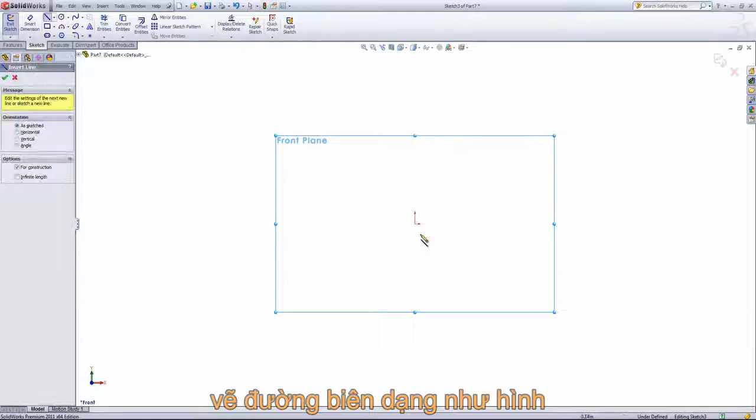And first we'll use the centerline tool and draw in a line vertically from the origin. And then we'll give that a dimension of 3 3/4 inches. From there, we'll start drawing in the profile using the line tool. And we're going to draw in a horizontal line slightly above the origin.

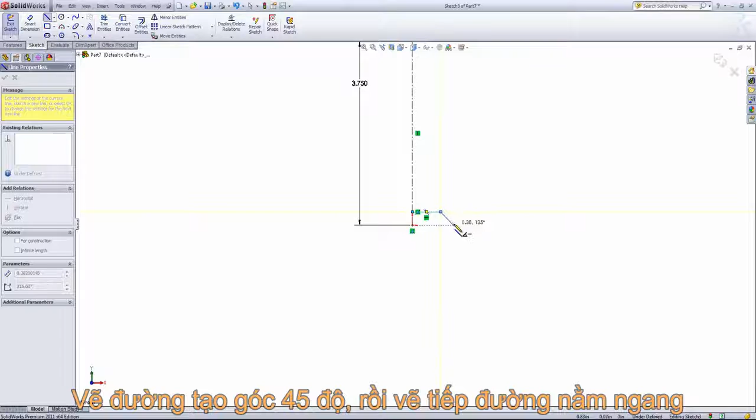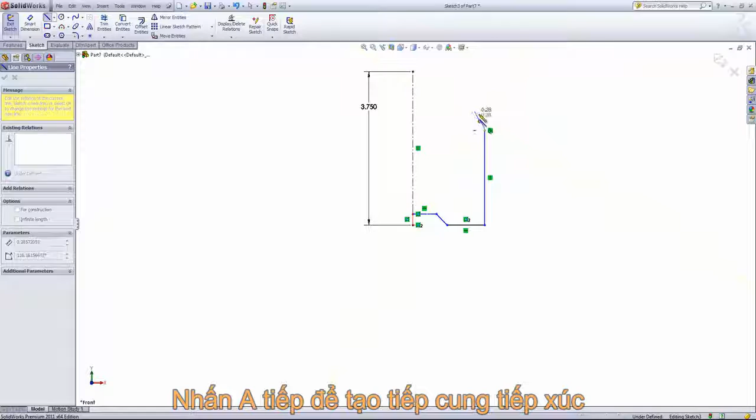And then draw down an angled line. It's also horizontal with the origin. And then we'll sketch out another horizontal line here. From there, I'm going to draw a line up. Then press A to create a tangent arc and add in one tangent arc. And then I'll press A once again to add in yet another tangent arc. And then from there, I'll draw up a vertical line.

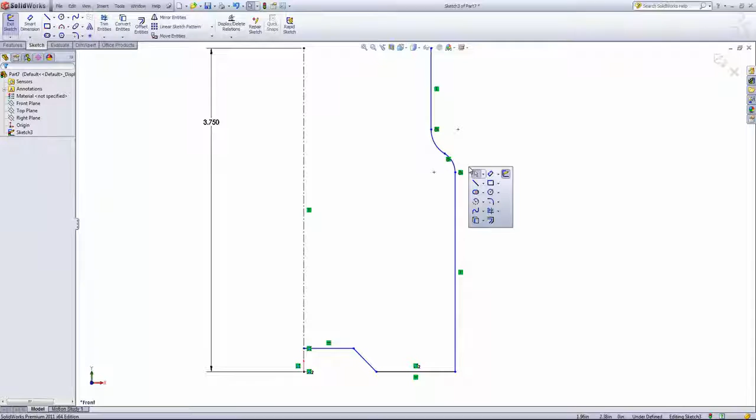Now, depending on how you added in the tangent arcs and the vertical line, you may need to add a tangent relation between the two arcs there. So go ahead and add those in if necessary. And then from here, we can start adding in dimensions. So this outside line segment is going to have a height of 2 3/4 inches. The bottom line here is going to have a length of 1/2 inch. And the top line will have a dimension of 3/8 of an inch.

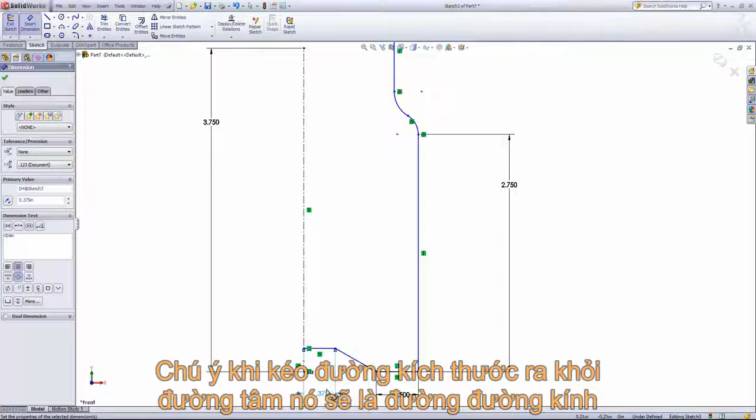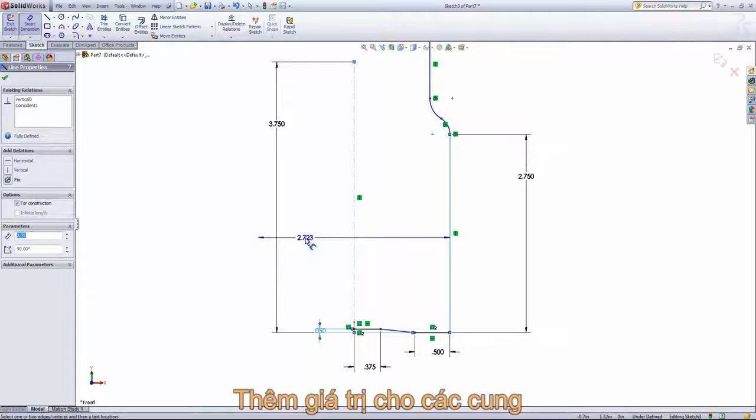And this indent here is going to have a height of 50 thousandths of an inch. And then we'll give this profile for the bottle a diameter by clicking on the outside line and clicking on the center line, and just dragging the mouse out to the outside of the center line. And we'll set that to 2 inches.

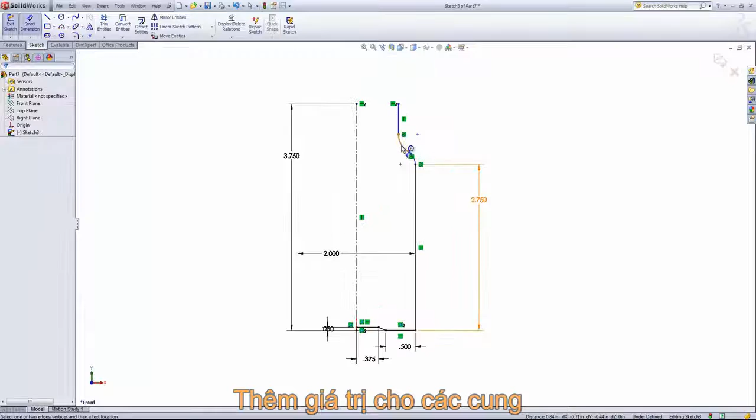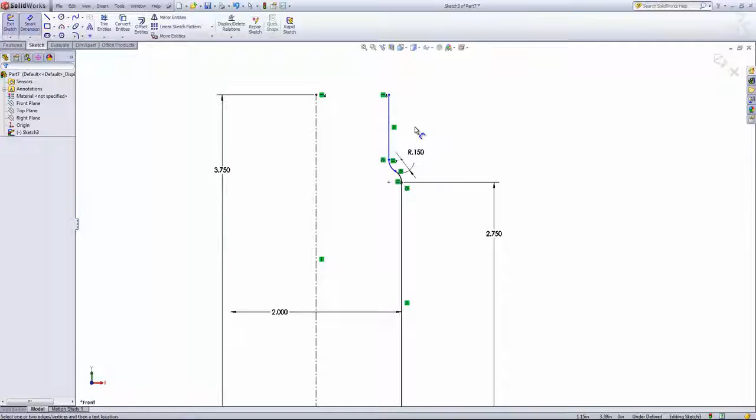Next, I want to make the top point of our profile and the top point of the center line there horizontal. And then I want to add in dimensions to our two arcs. This is going to be 0.15 inches. And the other arc is going to be equal in curvature. So we'll go ahead and make these two equal. Next, we'll dimension the top of the profile off from the center line and set a dimension of 0.675 inches.

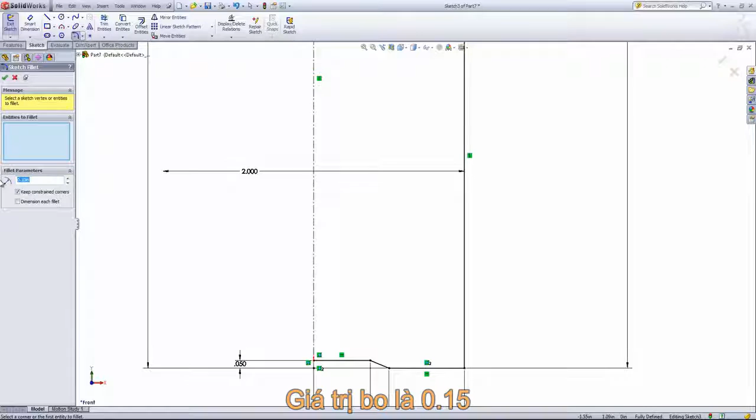And lastly, we want to create fillets at the bottom at the 3 corner points that we have on the sketch. I'll set the fillet parameters to 0.15 inches and choose those 3 corners. And then click OK.

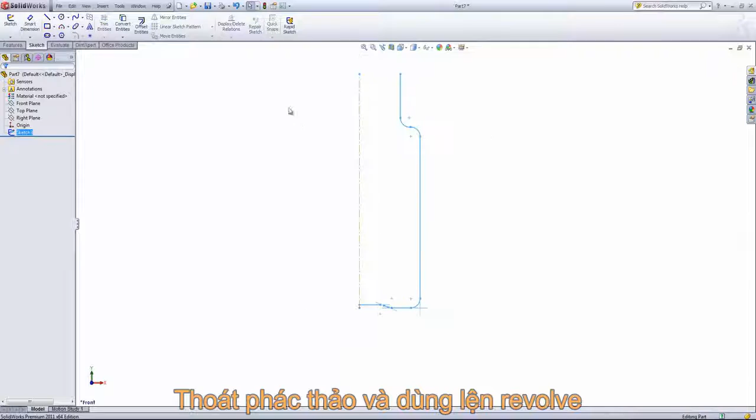From here we can exit the sketch and go into the Features tab and choose the Revolve Boss Base option. And we get this error message asking if we want to close the sketch. In this case, we want to choose no. And it'll automatically choose that thin feature option. If it hasn't already chosen that center line as the axis of revolution, you can go ahead and select that. And we're going to leave this at a thickness of 0.1 inches.

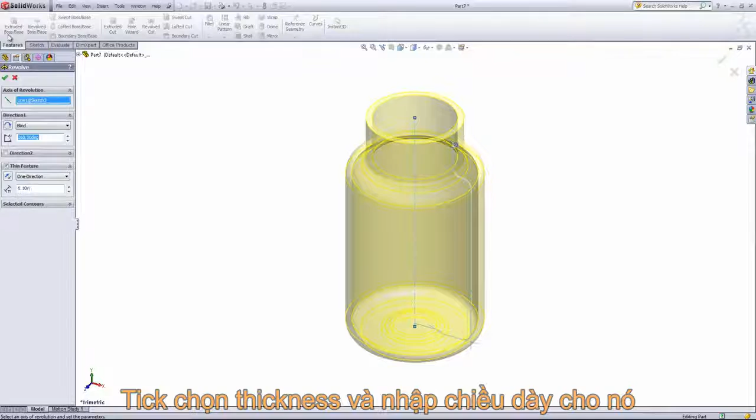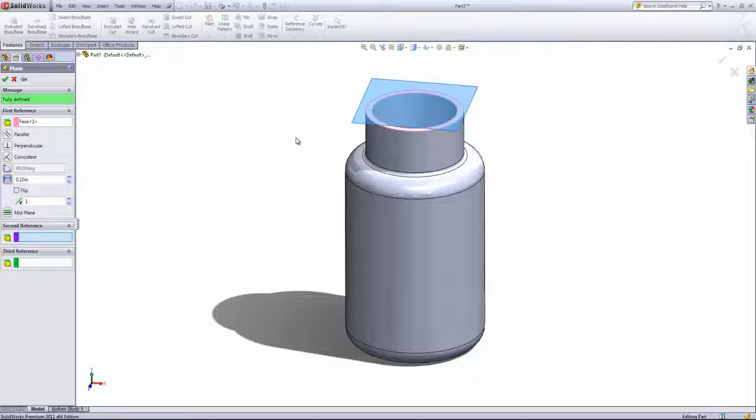Now that we have a profile for the bottle, we're going to create a thread for the cap. And we'll do that by choosing this top face, going to Reference Geometry, and selecting Plane. From there, I want to set this as 0.1 inches from that face. And I'm going to go ahead and flip that so it goes into the part, and click OK. From here, we'll create a sketch on that plane. And selecting the top edge, we'll go to Convert Entities and convert over that edge.

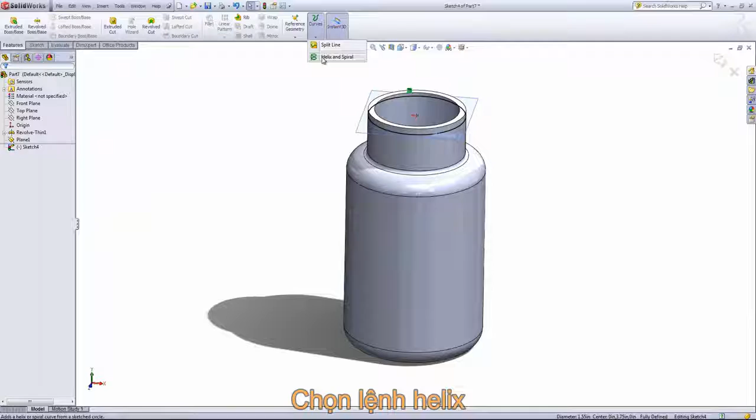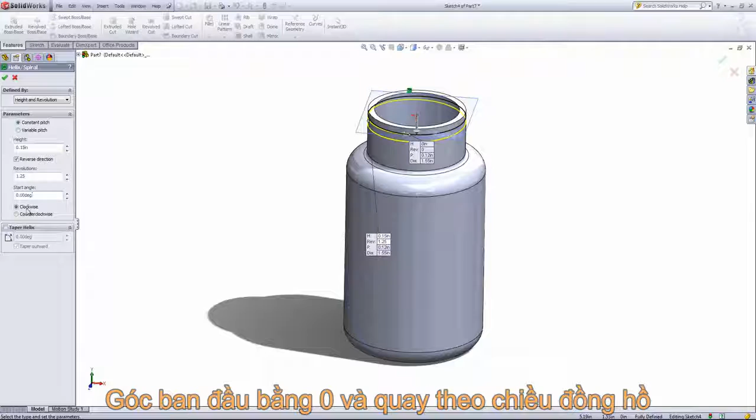Next, I want to come back into the Features tab and choose Helix and Spiral from the Curves pull-down. And we're going to define a helix by height and revolution. We're going to choose a height of 0.15 inches. Choose 1 1/4 revolutions, a start angle of 0, and we'll set this to clockwise. And click OK.

We'll be creating the thread for the bottle by using a swept feature. So next we need a profile for the sweep. Before we do that, I'll go ahead and click on the plane and hide that plane, making it a little bit easier to see. Then we'll create a sketch on the right plane.

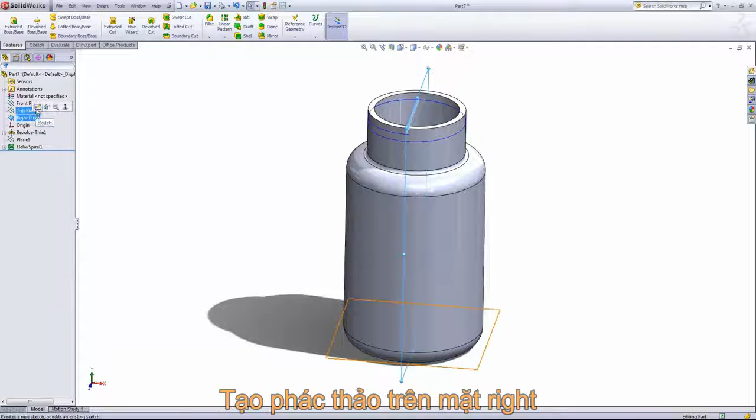I'll go ahead and draw in a trapezoid here. We're going to make the two opposing sides equal, then put a point at the midpoint of the back.

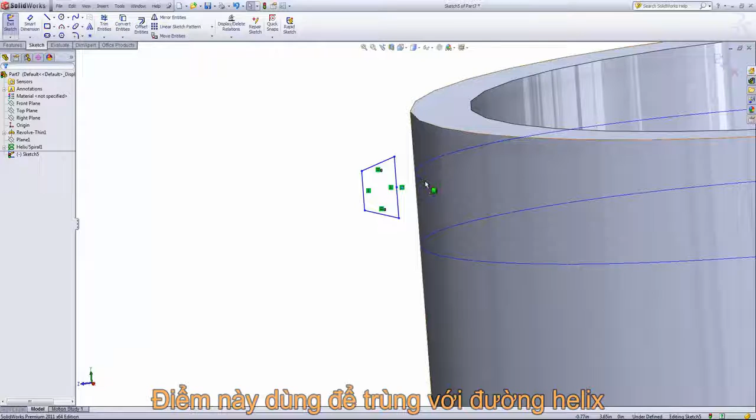That point will allow us to create a pierce relation with this helix. We want to select the helix, making sure not to select the point at the end of the helix since that contains no actual data. So we select the helix and the point and choose a pierce relation.

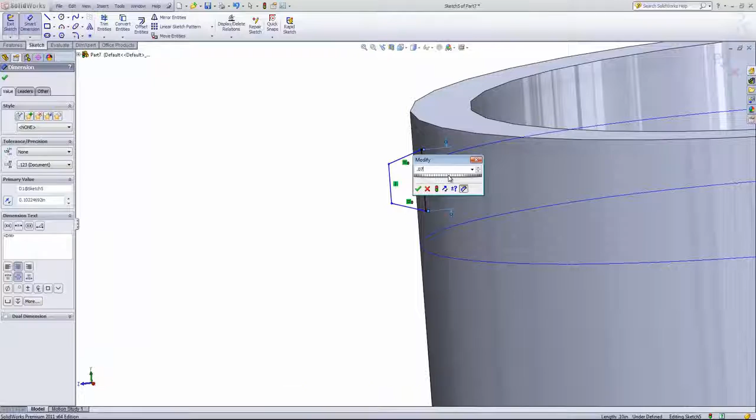Then we can add in dimensions. This is going to have a length of 0.07. This will have a width of 0.025. And this line will have a length of 0.022.

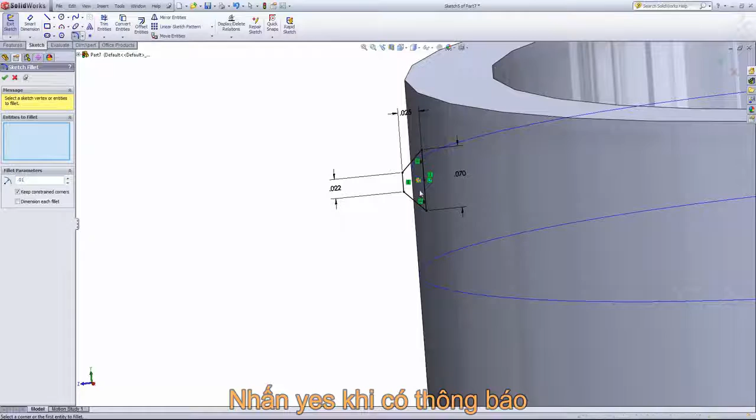Lastly, I want to add some fillets to these two front corners. We'll set the fillet parameters to 0.01 and choose both of those fillets, and you can go ahead and press yes to that error message.

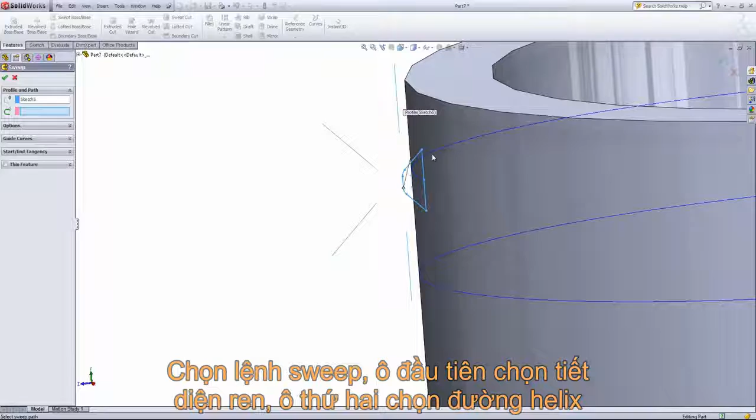From there we can go ahead and exit the sketch. Now we'll go into the Features tab and choose Swept Boss Base. In the first box it's asking for the profile, so we'll choose that sketch. In the next box we want to choose the helix. Preview looks good, so we'll go ahead and press OK.

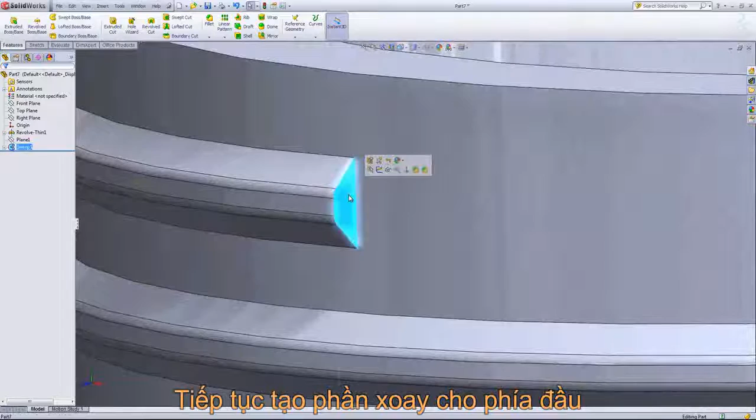Now we want to close off the ends of the thread, and we'll do that with two revolved features. The first will be created on this end. We'll select that face and create a sketch, choose Convert Entities, and it'll convert the outside profile of that face. Click OK, and then we can go into the Features tab and choose the revolved feature.

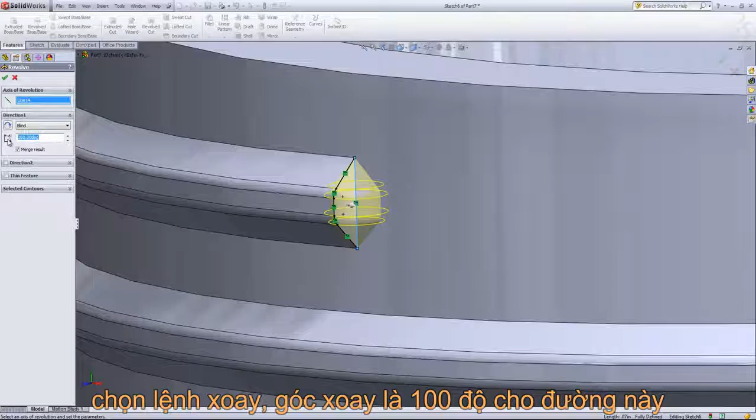For the axis of revolution, I'm going to choose that inside line, and for the angle we're going to make this 100 degrees. We'll do the same on the other side: once again create a sketch, convert entities, and create another revolve.

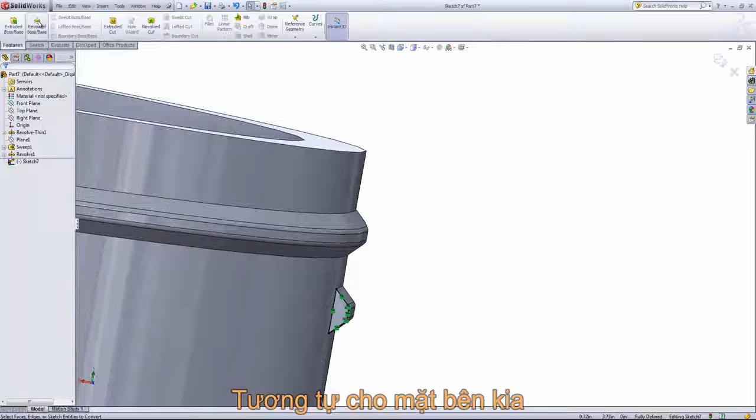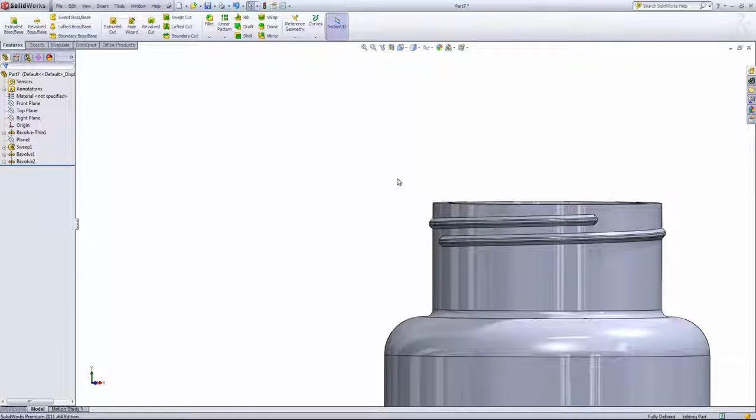Lastly, we need to create one more extrusion for the stop for the cap that would go on top of this. So the first thing we'll need is a sketch plane, and we're going to create it again from this top face. Go to the reference geometry pull down and choose plane. Once again, I'll flip the direction.

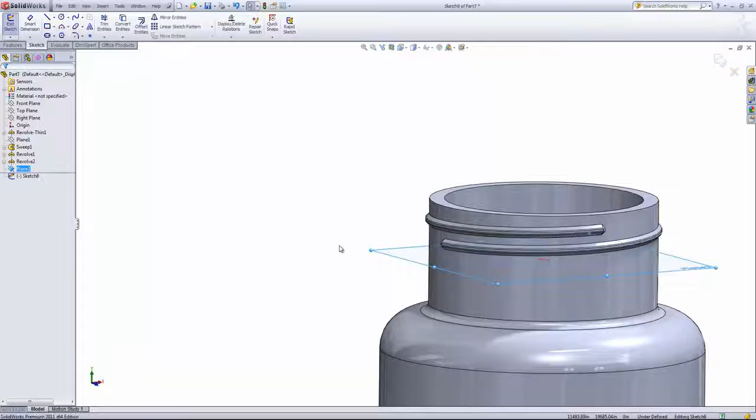I want to set this to 0.4 and click OK. From here I'll draw out a sketch, and once again we just want to convert over that top edge.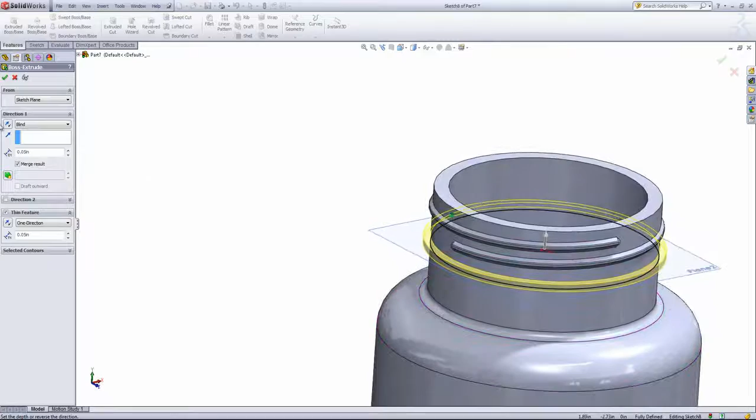We'll go back and choose the extruded boss base option. In this case, I want to create a thin feature on the outside there. If yours is facing the wrong direction, you can flip it by pressing this button. But we'll set this to a depth of 0.03 inches and a thickness of 0.05 inches as well. And I just want to go ahead and flip the direction of this feature, and click OK.

And lastly, I can go ahead and hide out that plane. If we wanted to add an appearance to this, we could as well.

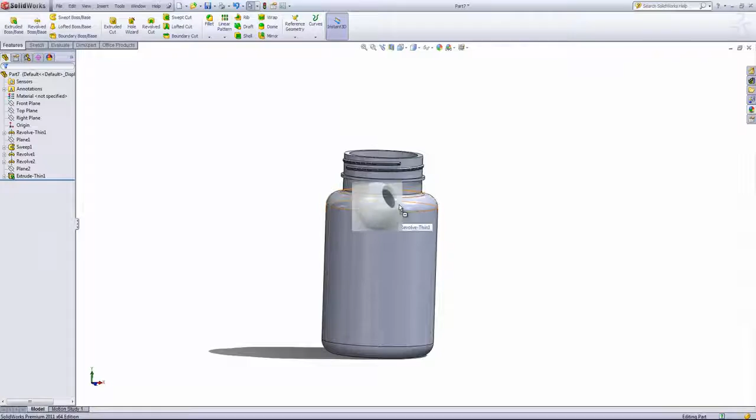Going into the Appearance tab on the right here, going into the Appearances, we'll choose Plastic, and we'll choose a medium gloss plastic and drop in the white medium gloss. If I drop this into the workspace instead of a feature or the face, it'll apply that appearance to the entire part. So there we have our bottle.